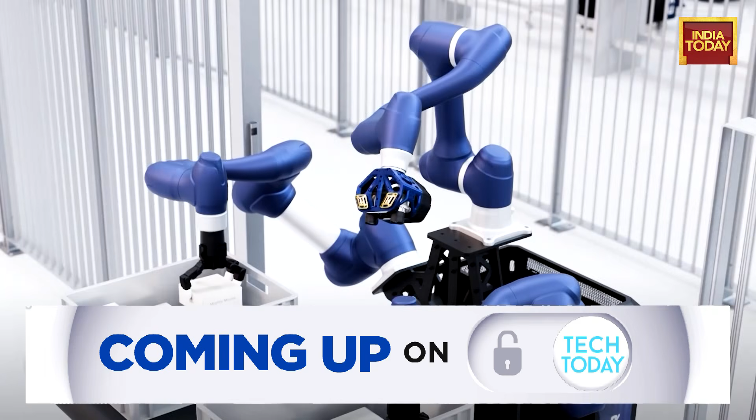This week's Tech Today show is a special one, and I will tell you exactly why. It's a deep exploration into the drone ecosystem of India. When you talk about defense drones, they are not just a support system in the air, they are turning into force multipliers, and we are seeing an example of that in the conflict in West Asia, which is why I believe it's important for every country to have its own drone ecosystem. We will try to explore that with a drone startup operating out of Bangalore. Plus, what is happening with commercial robots? How are they getting smarter and how are they helping industry evolve, because these robots are getting more intelligent with this new technology. Lots to unpack on this week's Tech Today with me, Cyrus.

So I'm trying to look at the bigger picture here. Right now, we are trying to get Predator drones from the United States. Each unit costs about 800 crore, and that's almost the amount of money that if you put into the Indian startup ecosystem, you'll be able to fund it for the next 5 years. So that's a lot of money. It forces me to think, what if I take that money and invest it in India, develop and make everything right here?

These are the drones we are looking at now, the MQ-9B SkyGuardian. It can fly from Mumbai to London without refueling. It can see a man's face from 25,000 feet. In the business of watching borders, there is almost nothing better.

But here's the uncomfortable detail. We are the nation that runs the world's back office. We write the code for Silicon Valley, we staff the data centers for Frankfurt and Austin, and yet, when it comes to the machines guarding our own borders, we are still window shopping in Washington.

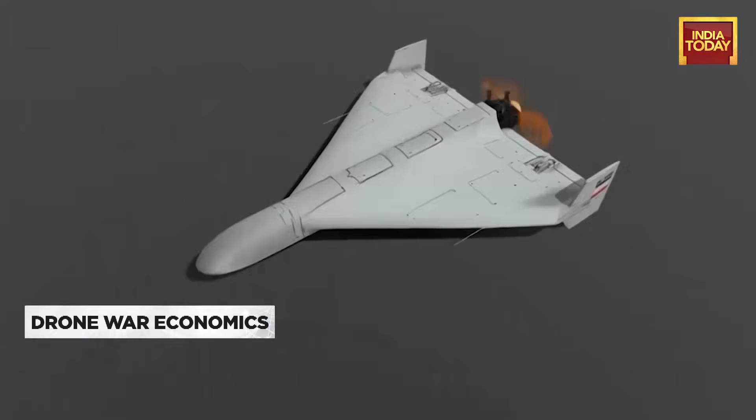An Iranian-made drone costs roughly $20,000 to build. Shooting it down can require a missile worth $2 million. That's the new math of modern warfare. Cheap offense forces expensive defense. And the more this logic takes hold, the more drones matter as intelligence, surveillance, and the nervous system of a modern military.

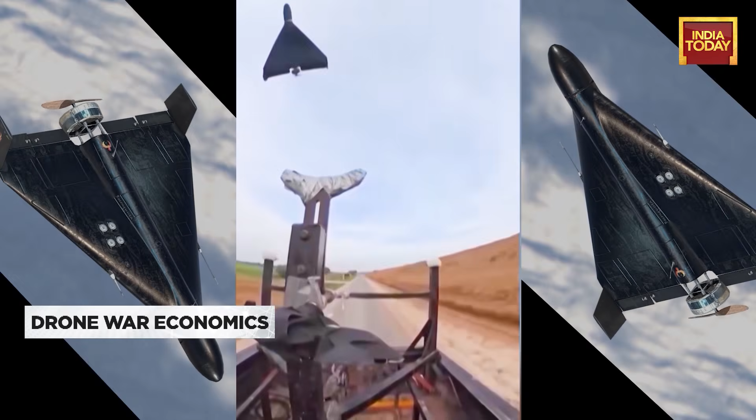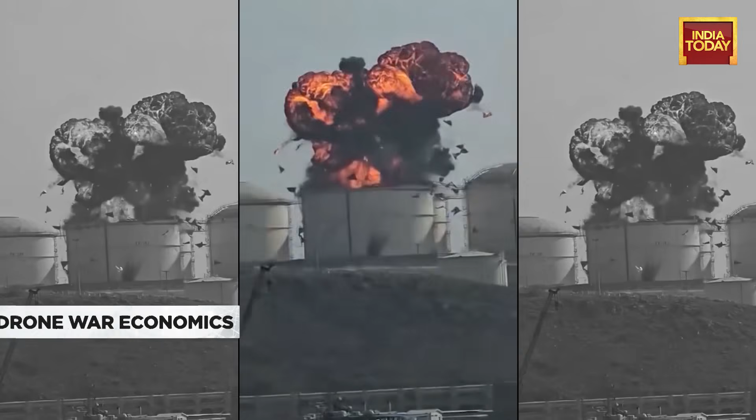More eyes in the sky, fewer boots on the ground. And if $240 million drones are crashing these days, it makes sense to make it cheaper, doesn't it?

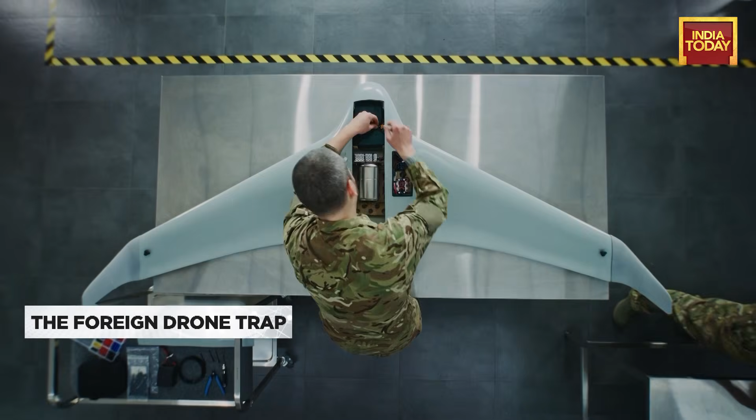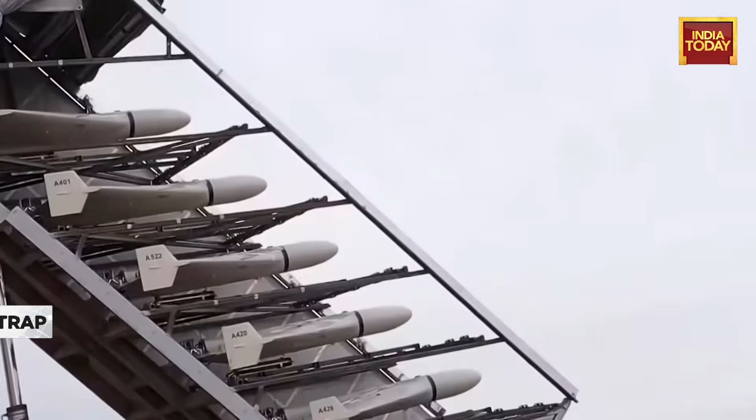But here's the trap. When you buy someone else's drone, you're buying into their ecosystem, their spare parts, their software updates, and sometimes quietly buried in the fine print of diplomatic agreements, their permission to actually use what you paid for. That's how arms deals begin, and it means the sky above your border might be watched by eyes with a foreign address.

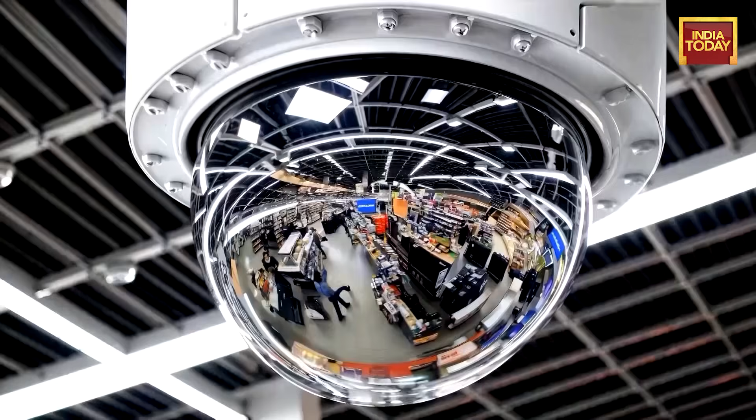Take for example what happened with the surveillance industry in India. All CCTVs that come embedded with Chinese components have been taken out of the production line as they pose a threat to national security. Similarly, drone manufacturers in India have been instructed to omit Chinese hardware and chips, a good move to promote indigenous products at scale.

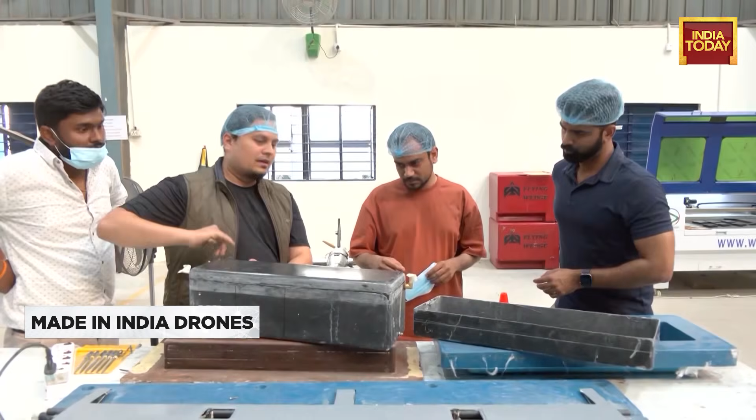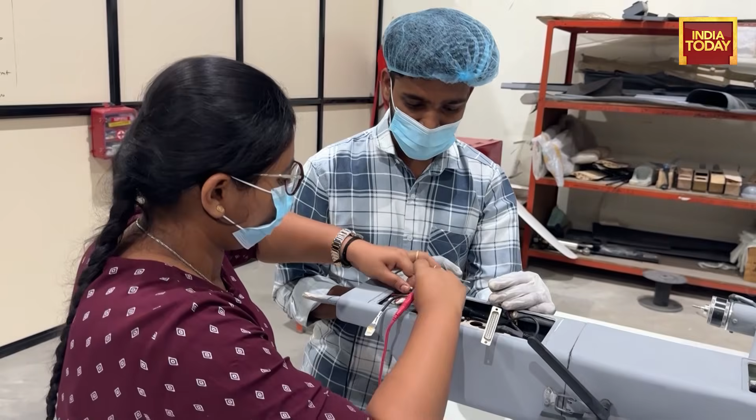To be fair, we tried to build our own way out of this, but one thing or the other always came in the way. There is a certain limitation with respect to altitudes, ranges and payloads. For example, we have a lot of multi-drone players in India who are doing phenomenally good, but again, we somewhere in our ecosystem miss these long-range platforms, like the Shahed 136 from Iran. We have been using Harop and Harpy, even in Operation Sindoor, to dismantle the air defense grid in Lahore, but one such system has to be developed in India too. While many players have started the programs, it looks like we might have to wait another 3 to 4 years.

For nearly a decade, India's defense was looking up to Tapas, DRDO's homegrown predator, the poster child for Atmanirbhar Bharat for defense. And it was a failure of ambition. The engineers worked hard, but the requirements were unforgiving: 30,000 feet altitude, 24 hours in the air.

Tapas topped out at 28,000 feet and 18 hours. In the Himalayas, those missing 2,000 feet are crucial to watch the enemy move and be invisible to them. In high altitude warfare, it means the difference between seeing and being seen.

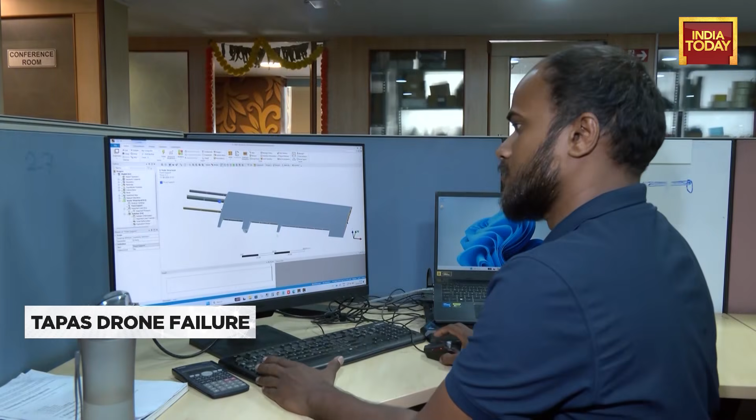Tapas has now been reclassified as a technology demonstrator, which is a polite bureaucratic way of saying it won't fly in a real conflict. The dream was real, but the timeline wasn't. While a private startup can redesign a wing in 6 months, a state-run project can spend years in committee before changing a bolt.

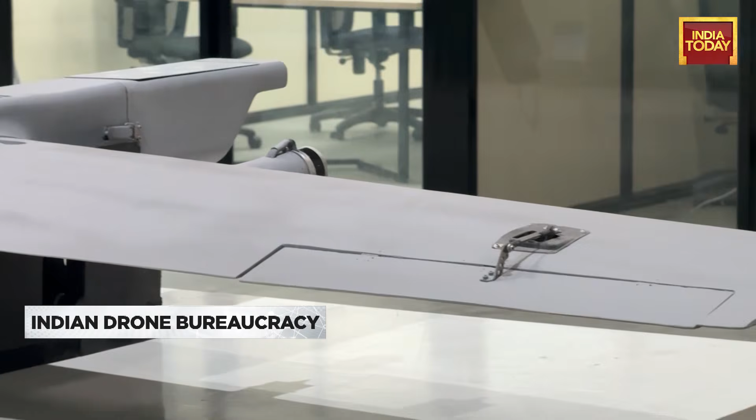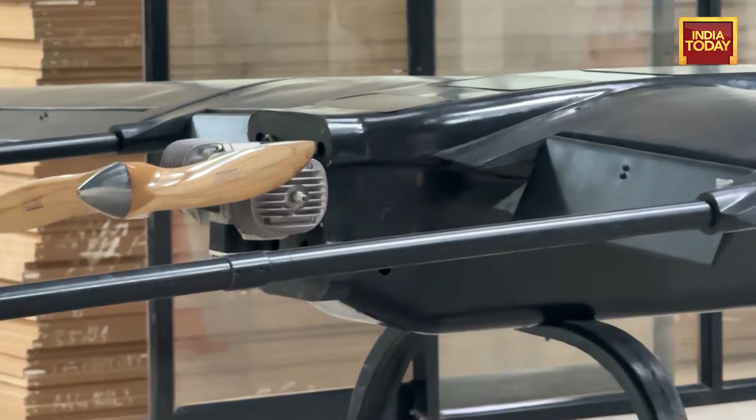Like this assembly line here at this facility. Looks bare bones, but even then, it's been able to create these attack drones that have successfully passed several demos and trials. But that wasn't enough to appease the stakeholders. So to truly see whether India can really compete, we went beyond the government labs and have come here in Bangalore to a startup that is making drones not only for India but also for the world, to see how capable we really are.

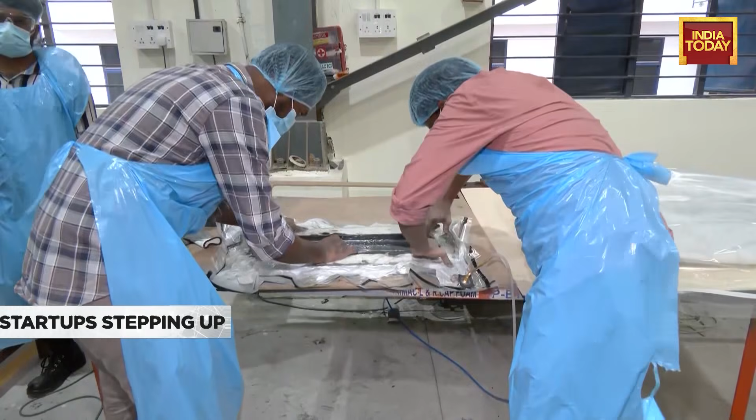While the headlines chase high-altitude imports, the Indian drone startup ecosystem is quietly doing something harder, building India's first military-grade bomber UAV from the ground up.

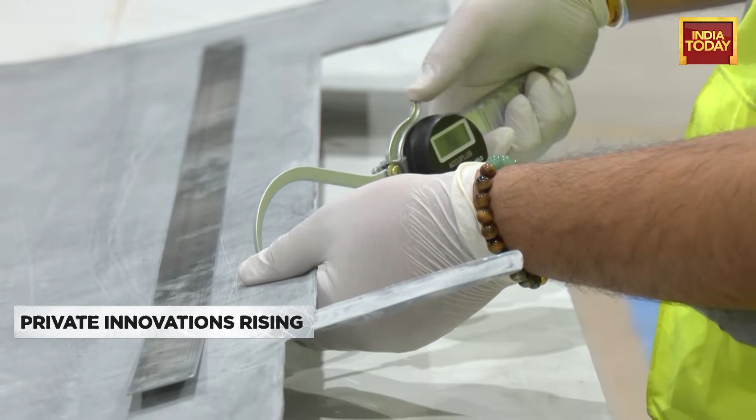We have been into 4 different domains. One is low-cost interceptors. We have been working on this from 2022, in fact, and we have been in constant touch with air defense. We have been showing a lot of demos, and over time, from development of prototype to hitting the targets, even in starlight, then in the pitch dark.

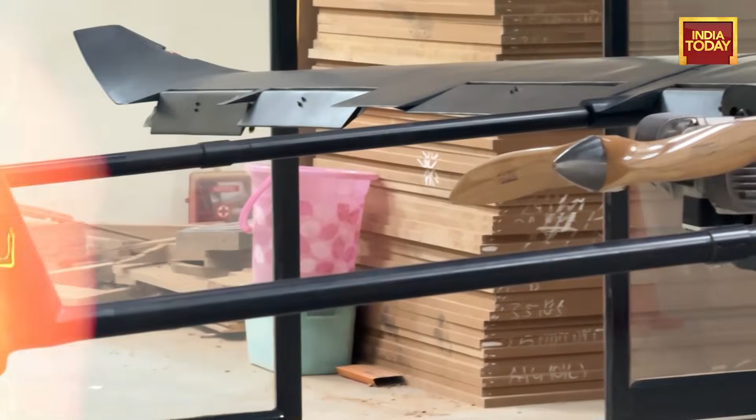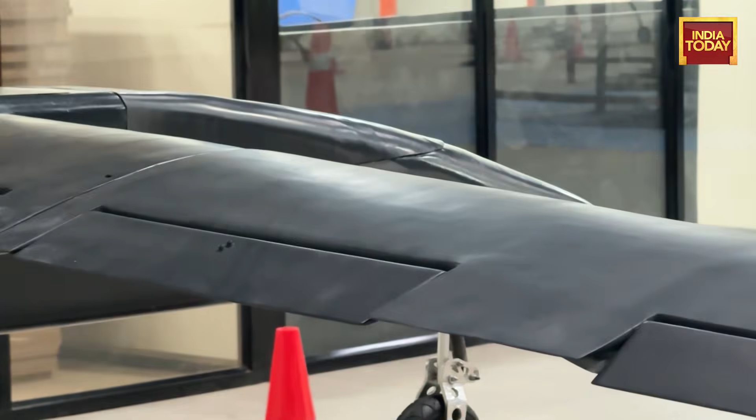So we have succeeded that, and we have given a lot of demonstrations, successful trials. On the other part, we have male UAVs that you're seeing right behind us. We have a small, medium variant, light variant, and a heavy variant as well. The light variant is designed for Army, which again has gone through a lot of demonstrations and field evaluations. Recently, we have also got an achievement in taking off in less than 60 meters and landing in less than 120 meters, navigating through gusts of more than 25 knots.

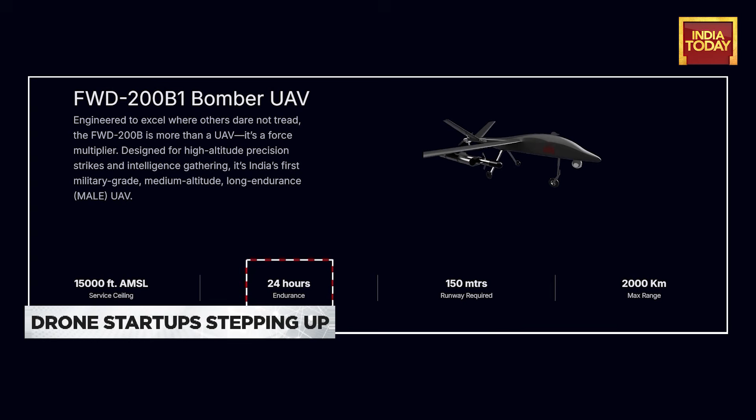The FWD-200B1: 15,000 foot ceiling, 24 hours of endurance, a range of 2,000 kilometers, more ground covered than any domestically built drone before it. And this is just one of the things being made here.

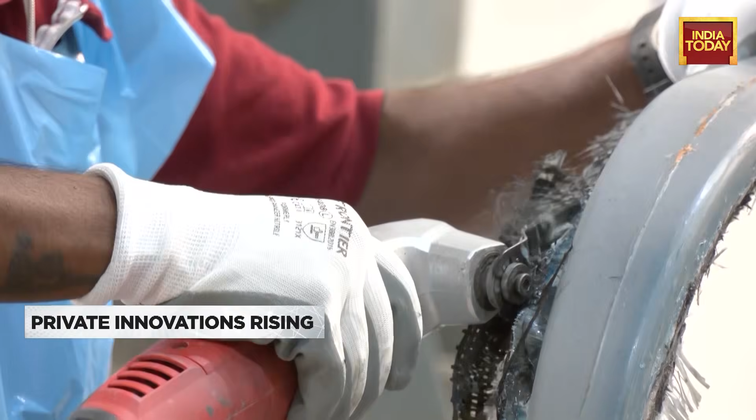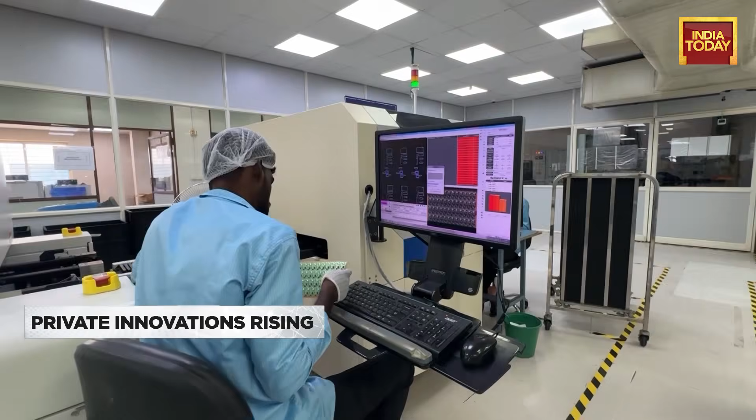We got to the floor where they are doing it. Proprietary carbon fiber molding, AI-assisted targeting, flight controllers designed and written entirely in-house. No foreign code in the cockpit. No outsourced brain.

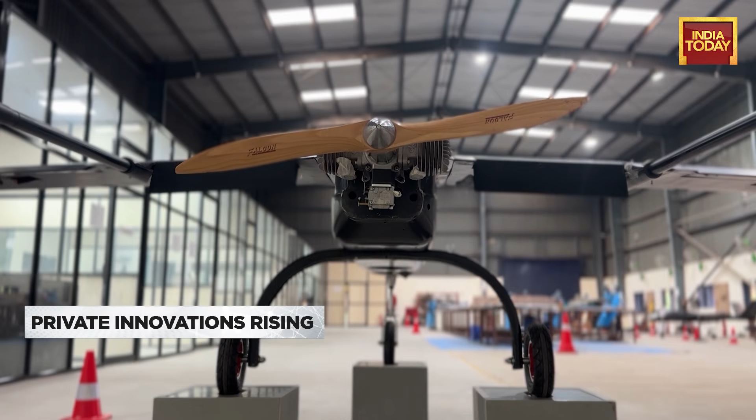While the assembly line might not look as high-tech, understand that these companies aren't making at scale right now. Before claiming recognition, these prototypes and concepts need to prove their mettle, only because the security of the nation is at stake.

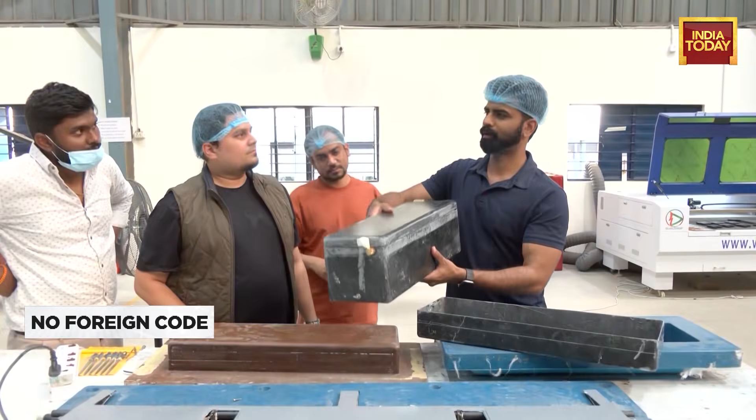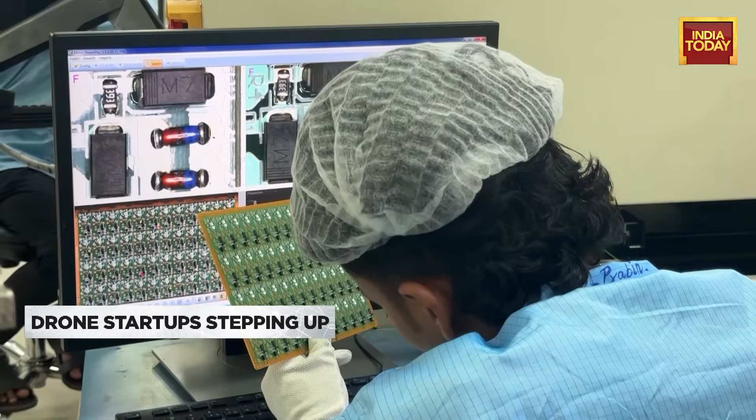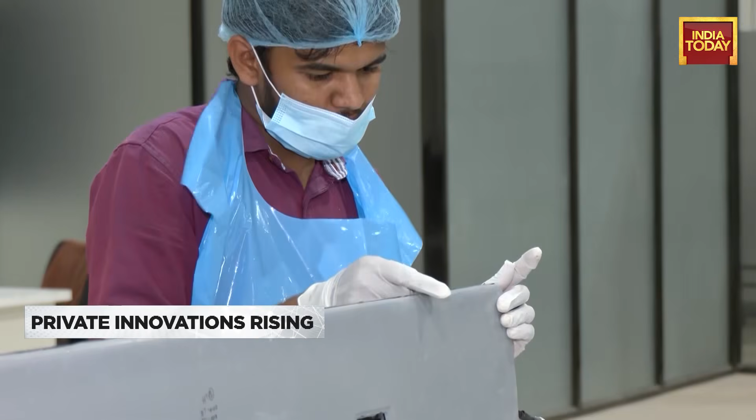By focusing on indigenous tech, these startups are removing the foreign code from our defense platforms. Their testing shows that Indian startups can achieve high-tier tactical results at a fraction of the cost of Western imports, ensuring every circuit is made in India and every byte of data stays on Indian servers. Because if you can build a drone tough enough for the Himalayas, you can build it for anyone.

In India, we don't have low Earth orbit communication infrastructure. So when we don't have that communication infrastructure, we definitely have to go on Iridium or Inmarsat or any other US satellites like Starlink, etc. But tell me, a system that has been on another satellite, though they say there is an encryption box, does the one who makes the lock not have the key? Then all your operations become compromised. We are choosing efficiency over security. That's going to hurt us very badly in coming days.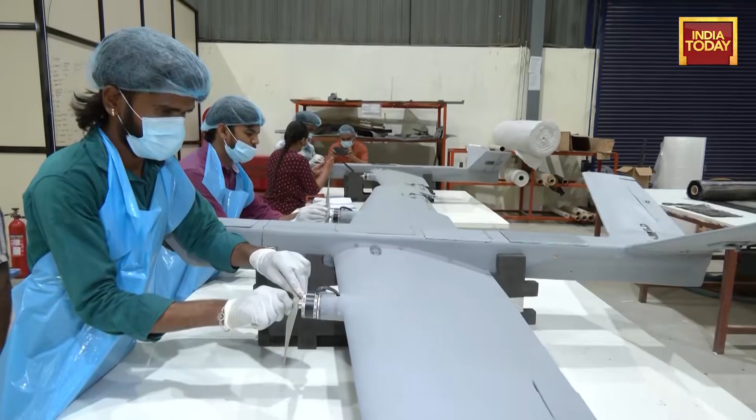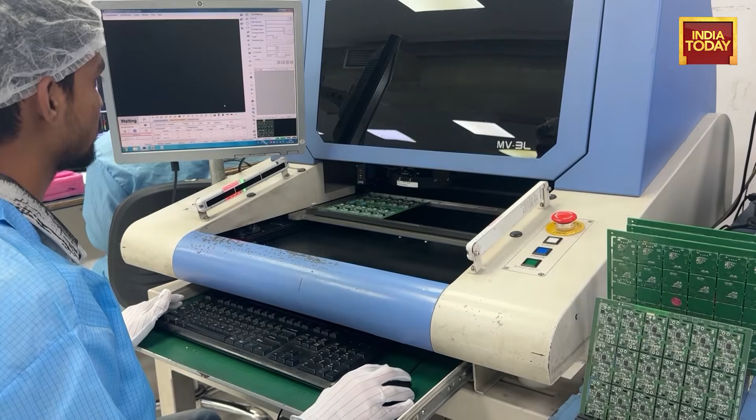Let's be honest about what really is at stake here, because it goes beyond the balance sheet. A drone is a collection of decisions made by whoever wrote the code, designed its sensors, and controls its software. If that person works in a lab in California or Tel Aviv, then no matter how many Indian hands assembled it, the soul of the aircraft isn't entirely ours.

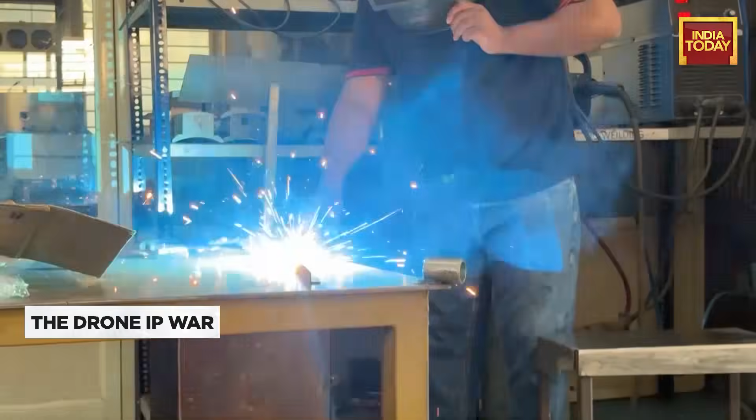And the risks are not theoretical: snooping, reconnaissance footage beamed from your border, mirrored onto a foreign server you have no visibility into. Kill switches, a remote command from halfway across the world that grounds your entire fleet the moment a diplomatic relationship sours. Maintenance lock-in, one denied spare part, and an 800 crore machine becomes very expensive scrap.

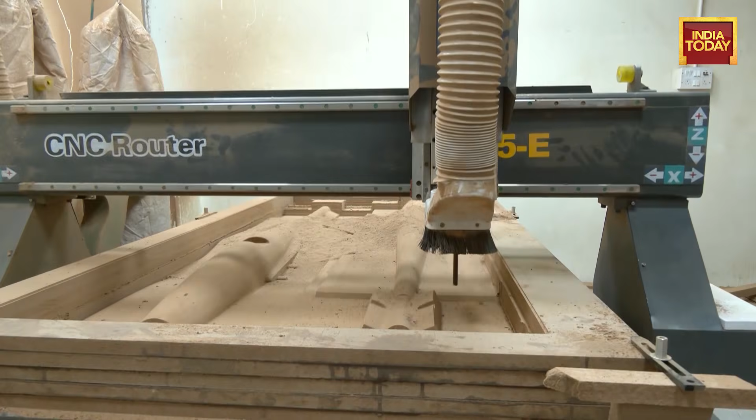All these are very real questions, but also there is, I would say, a serious amount of localization and industrialization happening in the system. There are communication protocols and chipsets being considered by the government to be localized. Again, it is not an overnight process which can happen. You cannot just put in a chipset and start manufacturing in India. You need to change the mindset, which the government is doing.

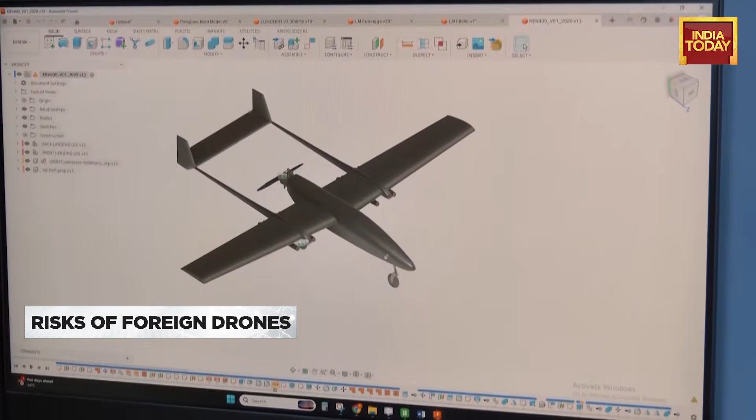When we build here, the money stays here, the intellectual property stays here, the engineers—the ones who know how these systems work, who can fix them in the field, who can improve them under pressure—they all stay here.

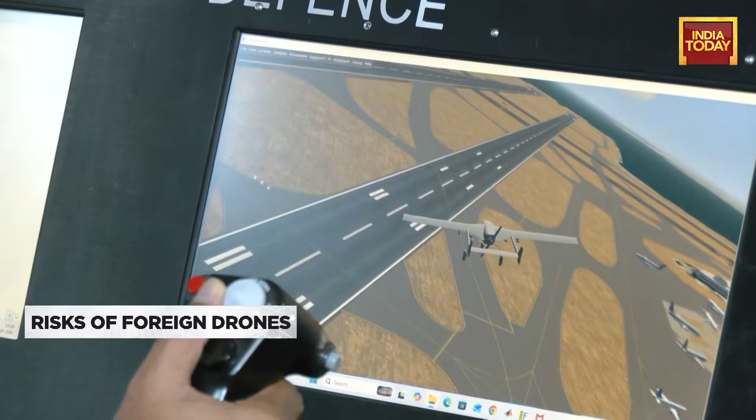And that's exactly what companies like Flying Wedge are trying to do, master the economic drone game and give India the upper edge in air combat. But beyond the hardware, you also need to make the software in India.

Today you see Rafale, we are taking the jets, but the French have denied the source code. That's the importance of the code that we definitely need to have, because if the code is in place, you can play around with your aircraft, customize it, add security protocols. Otherwise you will generally be denied, and you can produce that here.

Every rupee of the defense budget that funds domestic R&D is a rupee that builds the next generation of Indian engineers, not the next quarterly report of a foreign defense contractor. That needs to change, and we are slowly moving in that direction. The push needs to come from the government, and they need to seriously consider developing drones in India before it's too late.

So this was a glimpse of the India drone story and where we really are. Remember, if we have to garner success, we need to start making over here and be really serious about it. And it's not just the hardware, it's also the software. The entire tech stack and ecosystem needs to be made in India. Yes, for the short term, we can get drones from outside, we can get the tech, but in the longer run, we need to make sure Indian drones really stack up to become dominant across the globe.

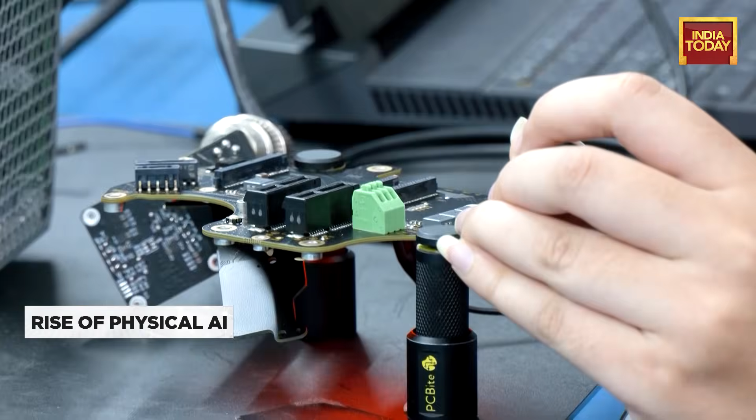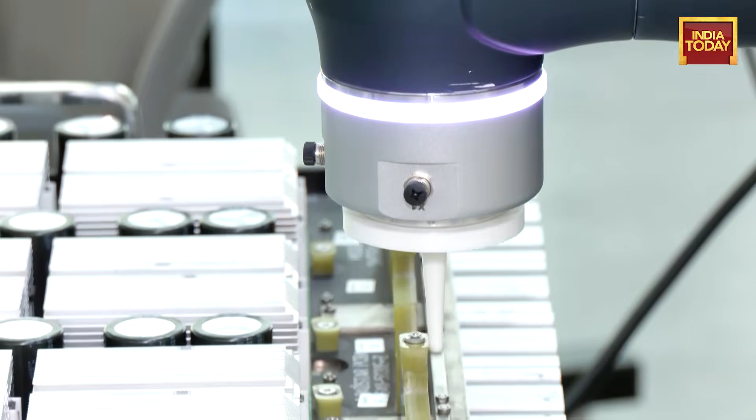Because the real world is messy, unpredictable, and constantly changing, that's where a startup like CynLr is trying to change that by building robots that don't just follow instructions but actually are smart enough to figure things out.

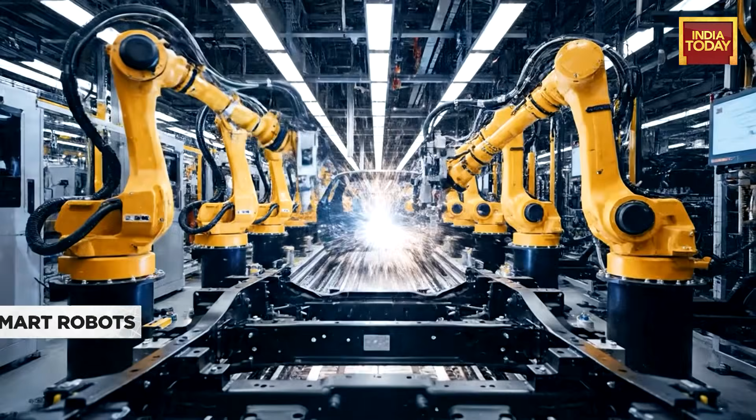Today, most industrial robots work in controlled environments, repeating the same tasks over and over again. The moment you introduce something new, a different shape, a reflective surface, or even a slight variation, they all fail.

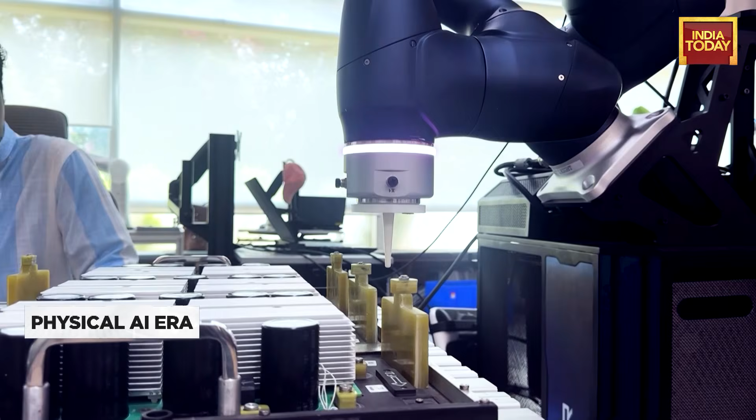That's because robots don't really understand objects. They are trained for them, and that training can take weeks, sometimes months. So the big question here is, what if robots didn't need training at all? What if they could learn on the go like humans?

Now it's time for one of the most exciting parts of this segment, and that is a demonstration. All that we have seen, all that we have talked about means nothing until we see the machines in action, which is why we have a robot here that is going to demonstrate how this entire technology works, not just on the software side, but on the hardware side. Let's take a look.

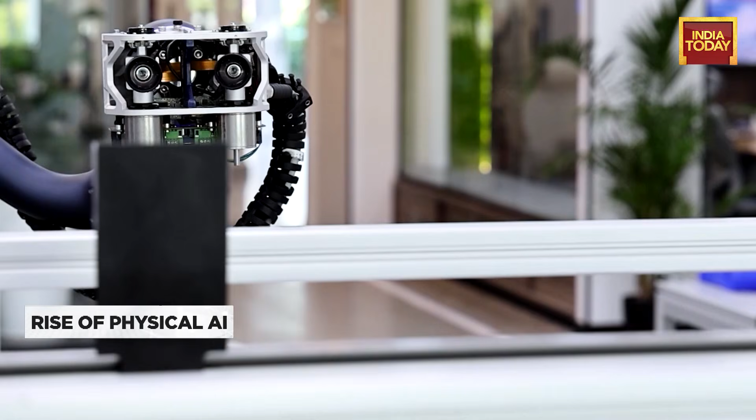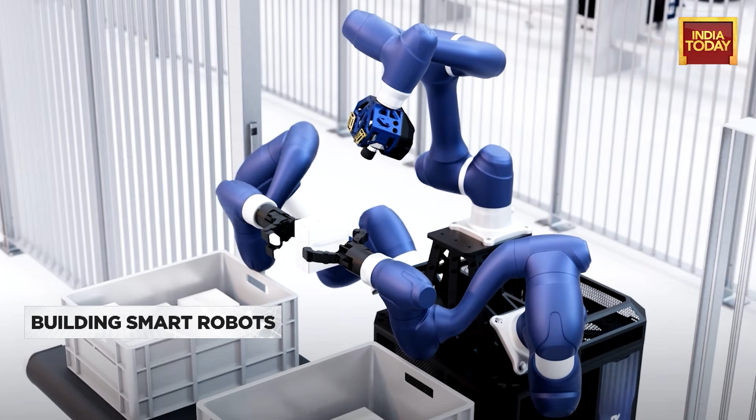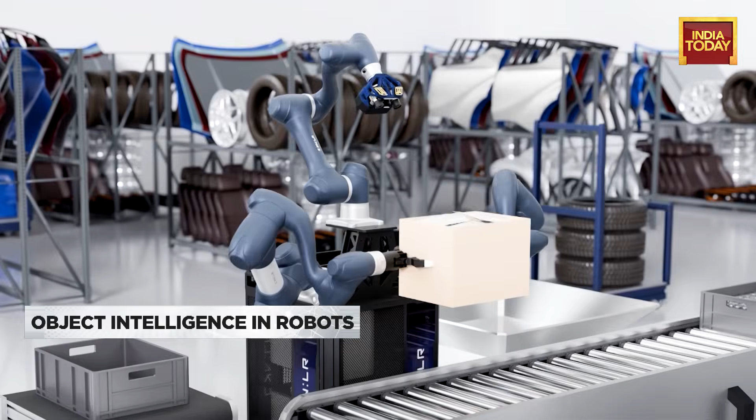What CynLr has built is something called object intelligence, a system that allows robots to analyze and interact with completely unknown objects in real time. Instead of relying on massive datasets, the robot studies the object's shape, texture, and reflectivity and then learns how to handle it, all within seconds.

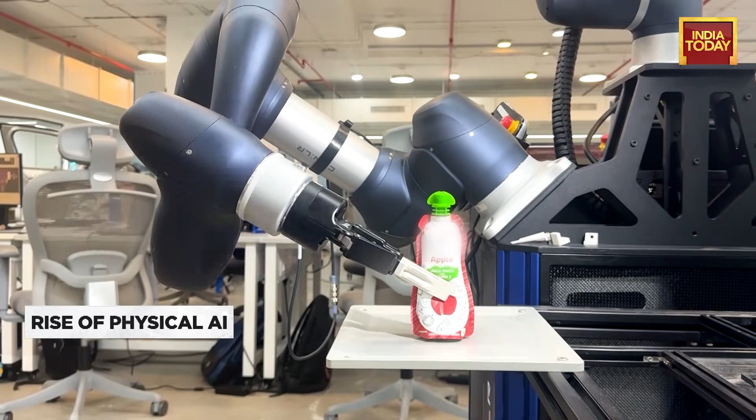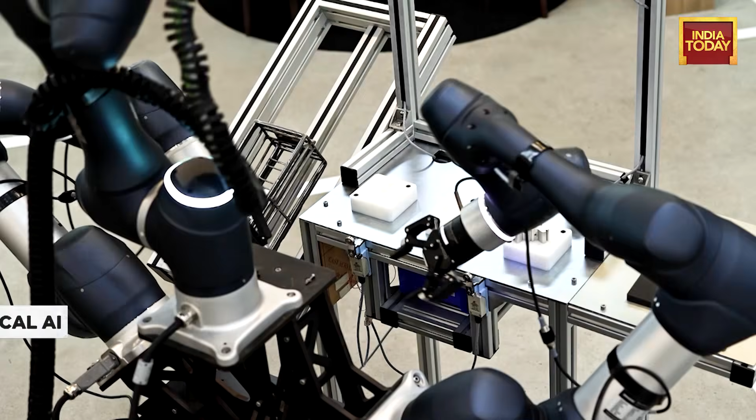In many cases, that learning happens in just 10 to 15 seconds, compared to months of training in traditional robotics. So this robot isn't remembering, it's reasoning, something rare in the field of robotics right now.

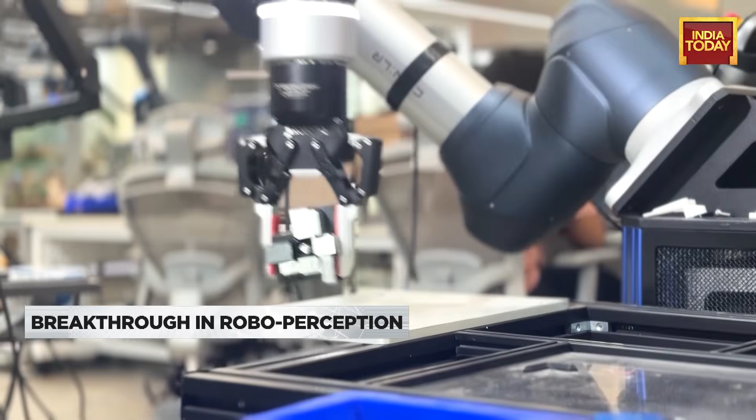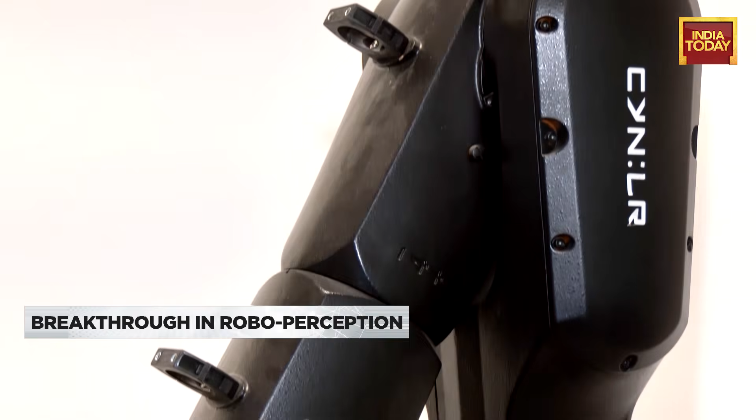At the heart of this system is a vision and perception engine that breaks down an object into geometry, texture, and possible grip points, almost like how a human brain processes what it sees. Every attempt the robot makes becomes a learning step, meaning it improves instantly without being sent back for retraining, all happening in real time.

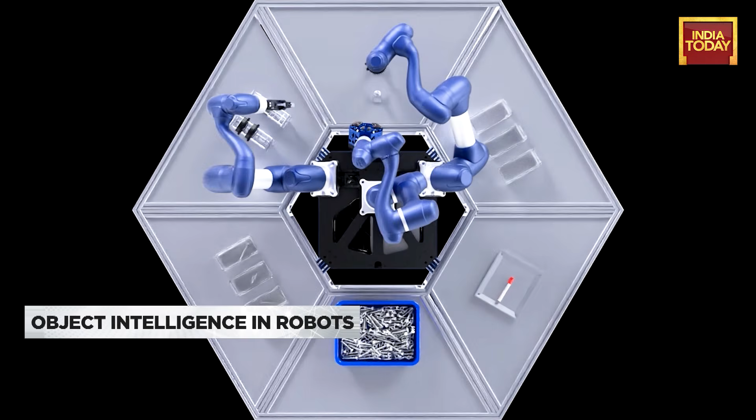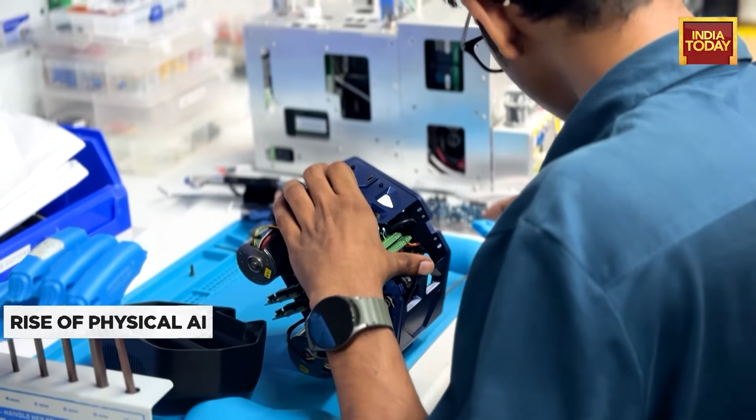As for the hardware, most of what you see is the result of a global collaboration. France, China, Israel, almost 16 countries supply the components to make this machine, with many of the mechanicals sourced locally. The logic is simple: if you're making robots for the world, it needs to be compatible with global standards.

So this can be, in a way, an example of physical AI, machines reacting in the real world. We've seen global players trying to perfect this technology, this intelligence, but the heartening sign of all of this is to see this tech happening in India, which just makes things really interesting.

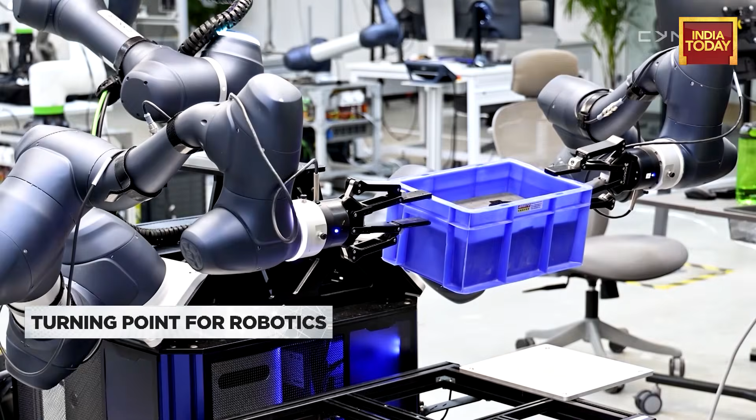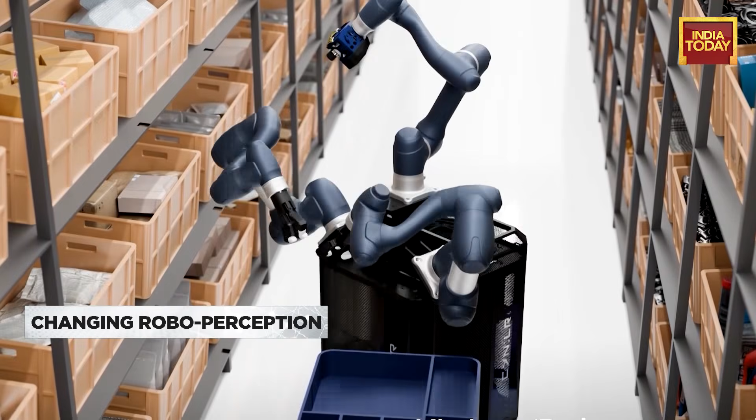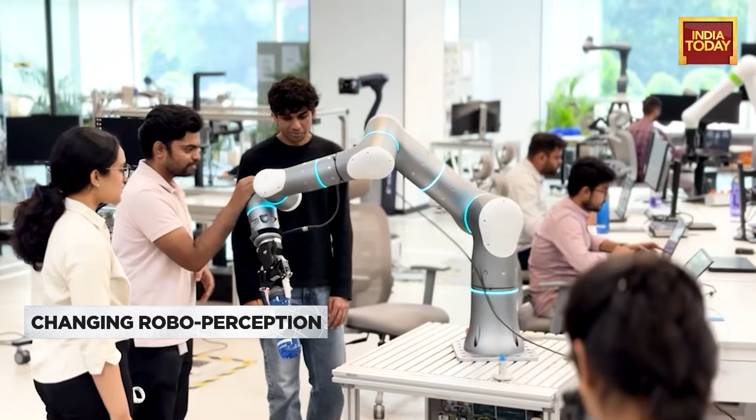Globally, robotics is at a turning point. For the last 50 years, automation has been about control, with focus on fixed environments, fixed tasks, and fixed outcomes. But industries today, from e-commerce warehouses to semiconductor manufacturing, are dealing with constant variation, and that's something traditional robots simply cannot handle. That is exactly where a company like CynLr's technology could change all of that, helping robots adapt to real-world complexity.

The idea is simple here. Instead of building factories around robots, build robots that fit into our world.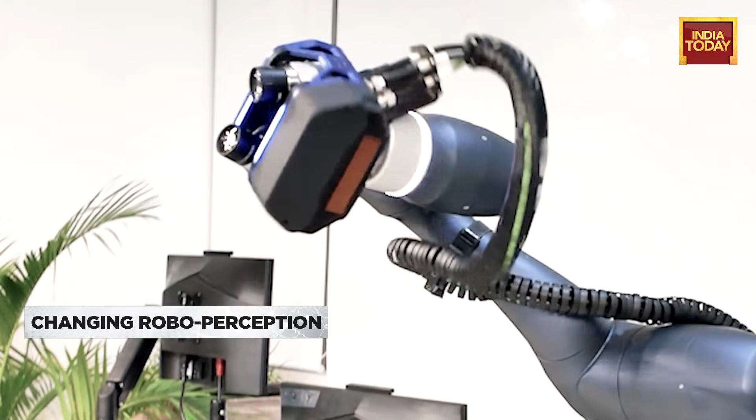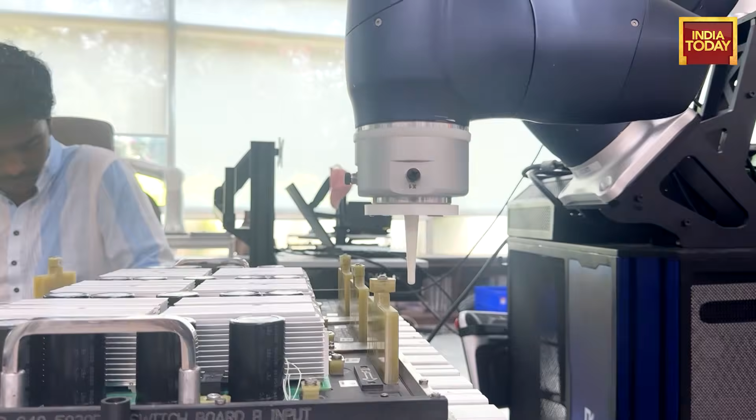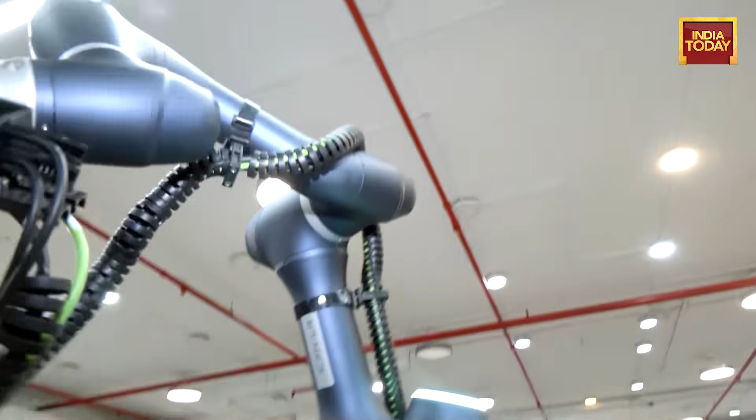Let's say I put the robot in an assembly line. If the wire comes in a different orientation, the robot must have been trained to handle that prior to it. If it looks very unfamiliar to the way it was trained, the robot becomes blind to that situation and stalls. That's the ability that we are bringing to the robot.

A human being, even if it looks unfamiliar, will still go grab it, look around to see where it is actually familiar, and then perform the pre-trained task or whatever anticipated task. That ability is absent for robots today.

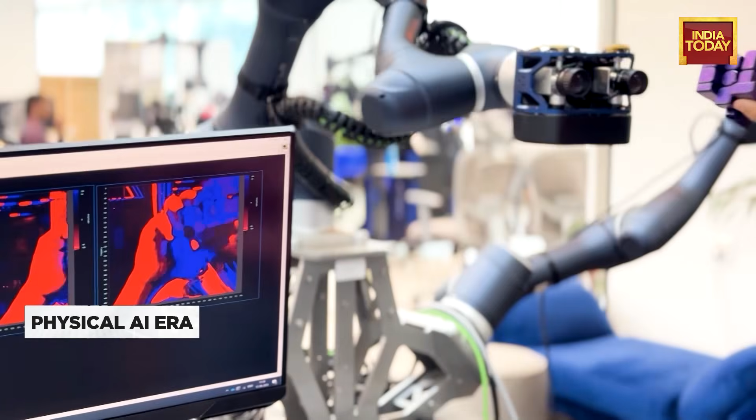We feel that focus should also be on building core robotics intelligence, not just assembling systems, but creating the underlying brain. CynLr doesn't just make the hardware, it also makes the software that makes these machines work. One ecosystem for a dynamic workflow.

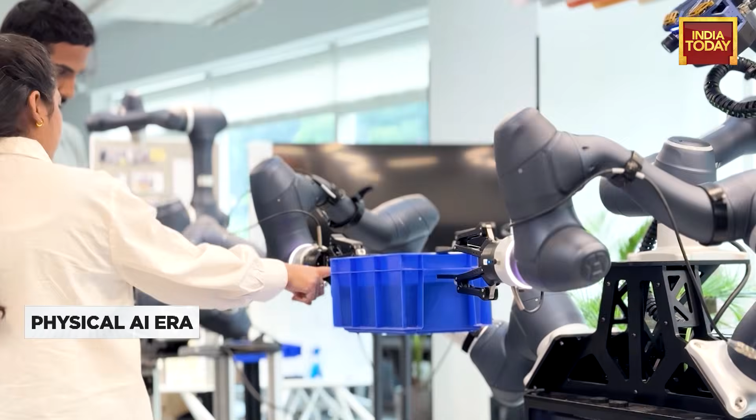Making robots work in a real lab like this is different compared to deploying them in the real world at scale. There are questions around cost efficiency and real world deployment that we need to address.

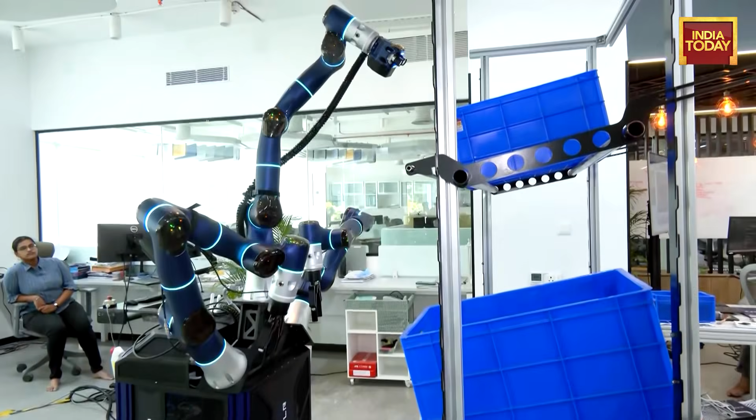We are right now at the pilot stage. We are taking it to the plants and trying to test for continuous operation and so on. It will take another 1 to 1.5 years for us to get it into a full production line where the customer develops confidence that over the next million cycles it's not going to fail.

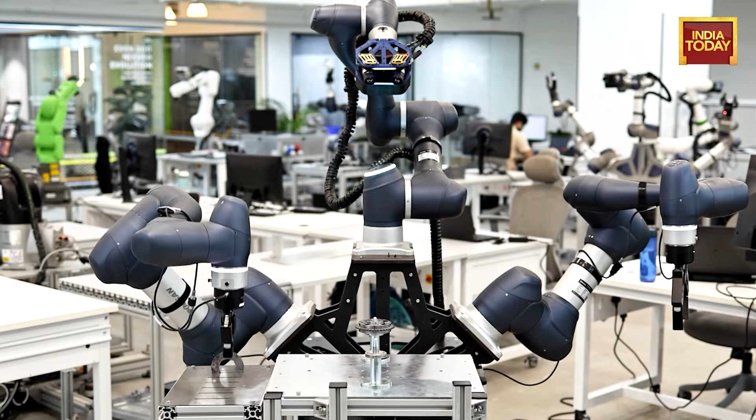You don't need human intervention, so you have a 3 sigma requirement and so on. We have a functional proof at this point. The next is going to be a process proof that it is sustainable and will work continuously without any error.

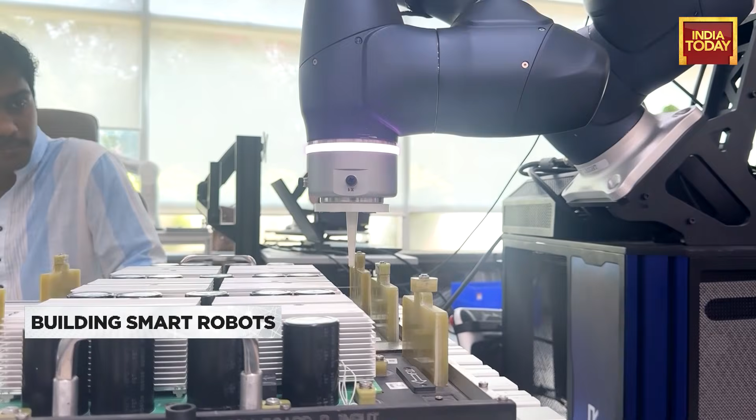So if this technology works, it could unlock something robotics has been chasing for decades: machines that are actually intelligent, being made here in India.

It's an opportunity for a country like India to take the effort back to our country, that instead of people, it could be through machines. So I think that will be one of the prominent sectors to adopt this earliest.

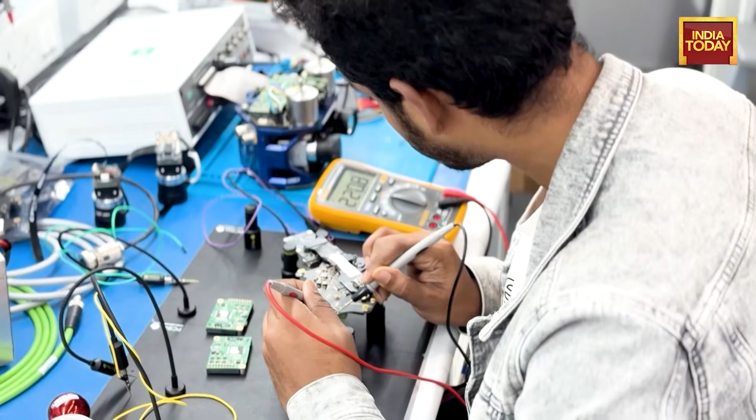There could be very interesting emerging opportunities. It could be in recycling, especially the repair economy, recycle economy, to a good extent where the value addition could happen. Apart from that, it will also be in semiconductor manufacturing and gadget assembly, mobile phone and white goods assembly. And the story doesn't end here.

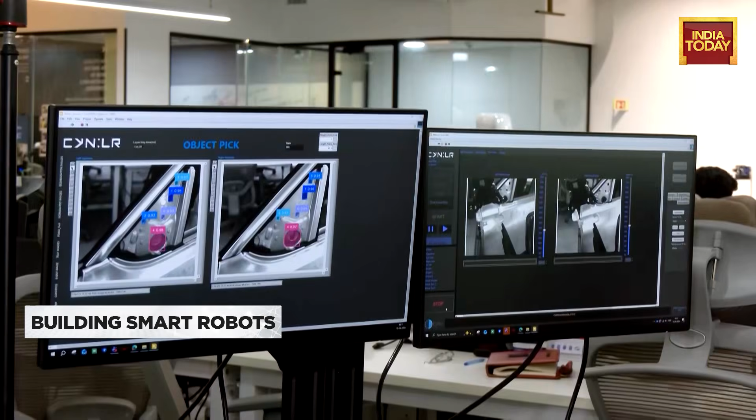As adoption for this tech rises, we will see applications rise as well. Today, it's robotic arms trying to screw bolts into car doors on factory assembly lines. Tomorrow, it could be robots working in essential services and even manufacturing or other fields.

Robots have a different set of abilities. If you want to successfully and economically adopt robots for automation, we may have to rethink the process that suits the robots, where they are strong and where they are weak.

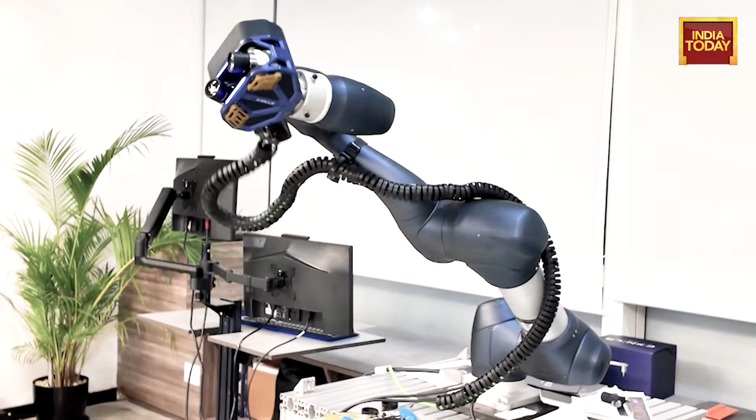We have built poka-yoke and all of that. That comes because human beings have a tendency to confuse. Robots don't have that confusion, so that is not applicable here. So there is this process transformation that has to happen.

If you do that, you will be much faster in adopting robots than the way we are going today to adopt it. The pace will change.

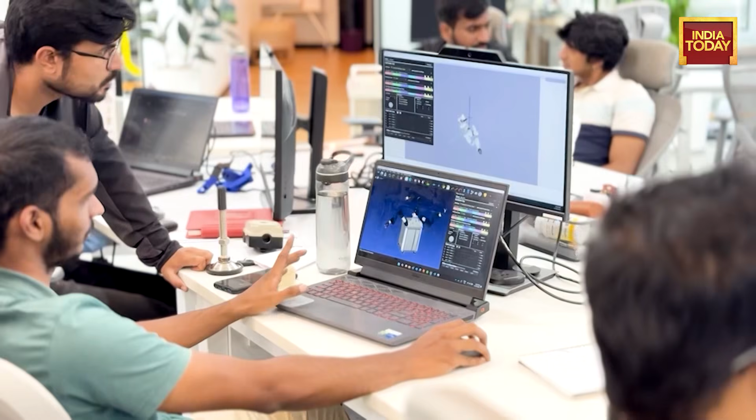So CynLr is trying to solve a major problem: giving robots the intelligence they don't have right now, and turning them from tools that follow commands into machines that actually understand them.

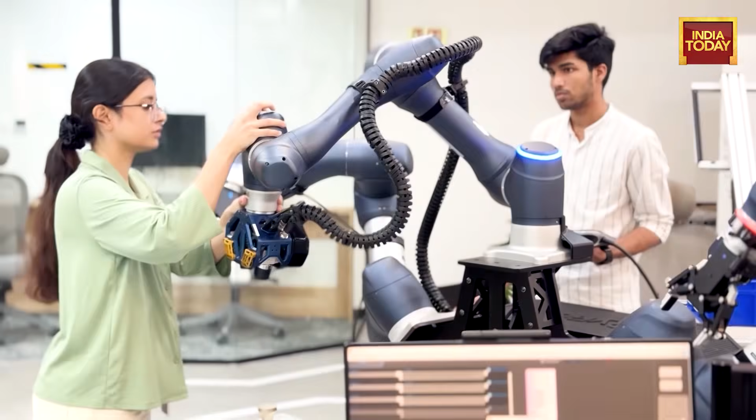You see me, I'm just overjoyed when I'm seeing myself around technology, and that's exactly what I'm trying to show you, what the future is going to be like as robots evolve. And the one thing I wanted to highlight, yes, robots are fast, they are efficient, but now they are getting smarter.

What we showed you today is a glimpse of how the entire dynamics around robotics is going to change, because now they're able to understand objects. And soon, maybe in the future, that person sitting beside you at work could be one of these.